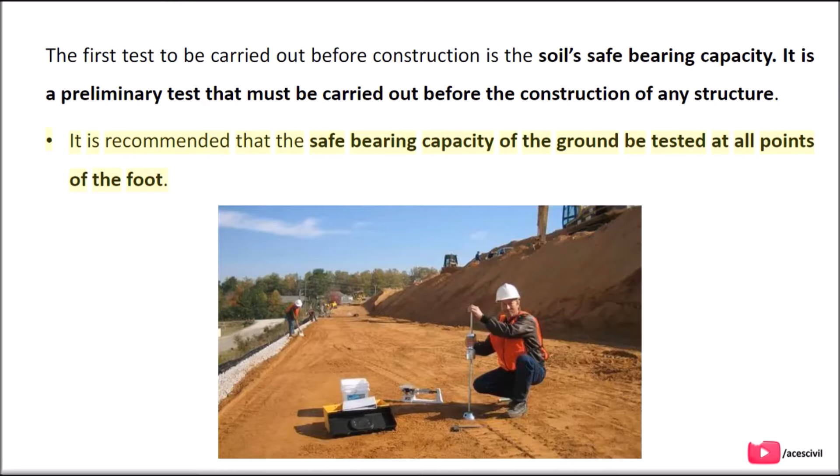In today's video we are going to discuss what is SBC of soil. The first test to be carried out before construction is the soil's safe bearing capacity. It is a preliminary test that must be carried out before the construction of any structure. It is recommended that the safe bearing capacity of the ground be tested at all points of the footing.

What is SBC of soil? The safe bearing capacity of soil field test is performed to verify the soil's ability to support loads. Let's consider an example of a small plastic chair. The small plastic chair is made for children and can support a capacity of 10 kilograms. Suppose an adult sits down, the chair will be broken. The same case is applied to the soil.

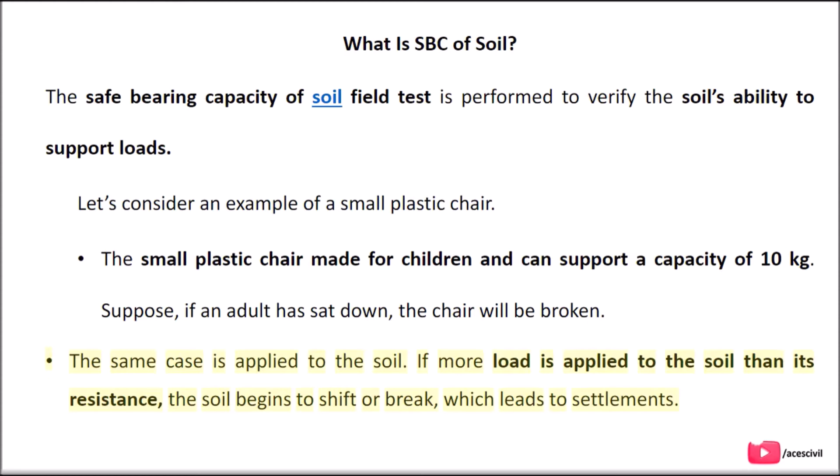If more load is applied to the soil than its resistance, the soil begins to shift or break, which leads to settlements. In order to keep the structure safe, the safe bearing capacity is calculated on the field at different points, and the footing selection is made accordingly. The maximum load per unit area that the soil can support without any displacement or settlement is referred to as safe soil capacity.

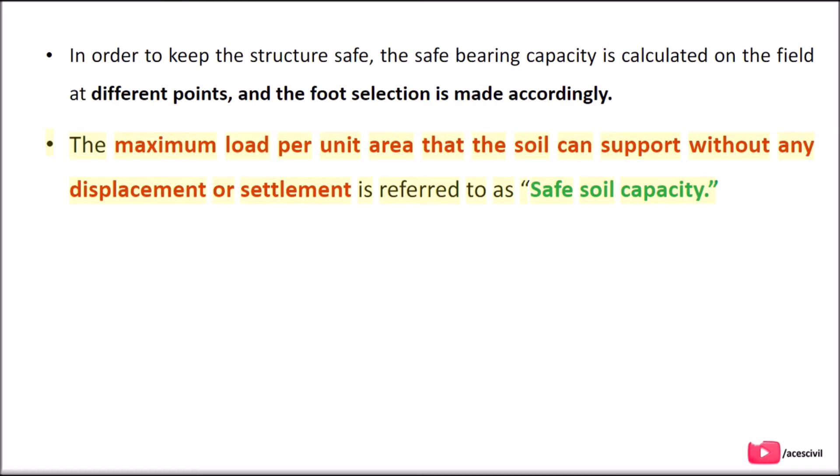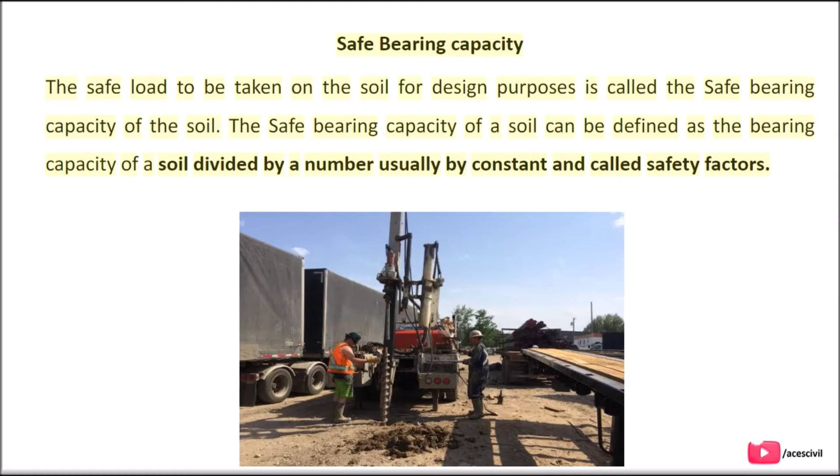Safe bearing capacity. The safe load to be taken on the soil for design purposes is called the safe bearing capacity of the soil. The safe bearing capacity of a soil can be defined as the bearing capacity of a soil divided by a number, usually a constant, called the safety factor. The safety factor depends on the type of construction and the nature of the soil. Generally, a safety factor of 2 to 4 is used for different purposes.

If the final load of the soil is 6 tons/m2 and its safety factor is 3, the work or project loads to be given to this soil will be 6/3 equals 2 tons/m2.

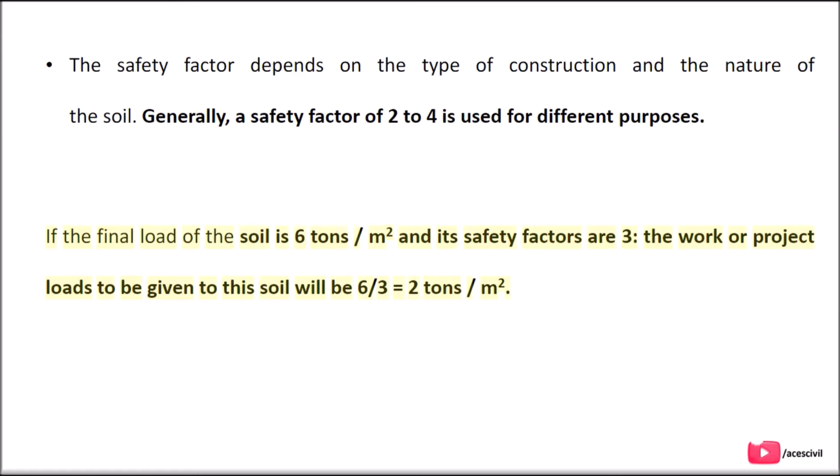Soils and their bearing capacity. The soils on which a structure rests can be classified into 3 categories. Hard soils. These soils are generally rocky in nature, incompressible, and can withstand reasonably good loads. Solid rock, murum, and rocky soils are examples. Soft soils. These are alluvial soils and are compressible when loaded. They can carry a lot of loads. Common clay and common soils are examples of this.

Spreading soils. These soils are compressible when confined and prevented from spreading. These soils, when loaded, spread laterally. Sand and gravel are examples of this type of soil.

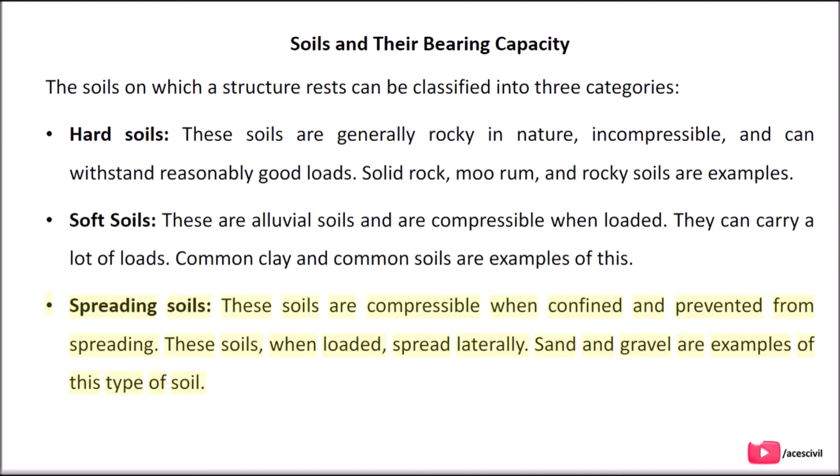Safe bearing capacity values for different soils. The capacity of the soil to allow loads from the foundation is called the bearing capacity of the soil. The gross pressure at the base of the foundation at which the soil fails is called the ultimate bearing capacity. When considering different failure conditions, the ultimate bearing capacity is divided by a certain safety factor, and the resulting one is called the safe bearing capacity of the soil.

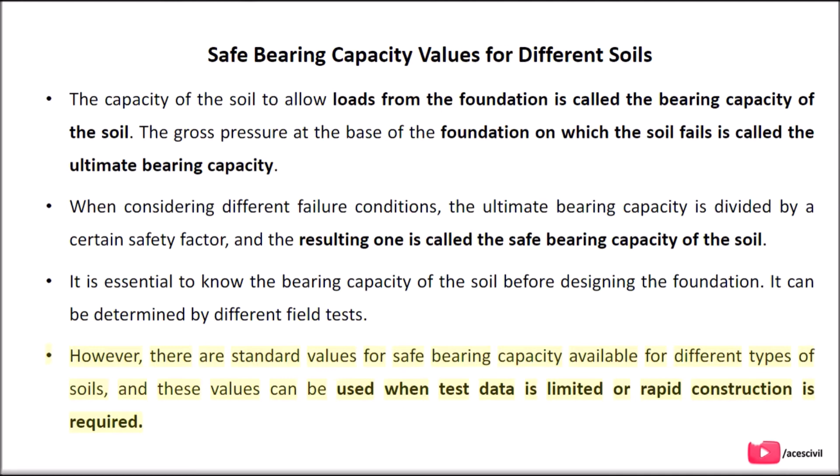It is essential to know the bearing capacity of the soil before designing the foundation. It can be determined by different field tests. However, there are standard values for safe bearing capacity available for different types of soils, and these values can be used when test data is limited or rapid construction is required. Values of safe bearing capacity for different soils. The following provides values for the safe bearing capacity of different soil types.

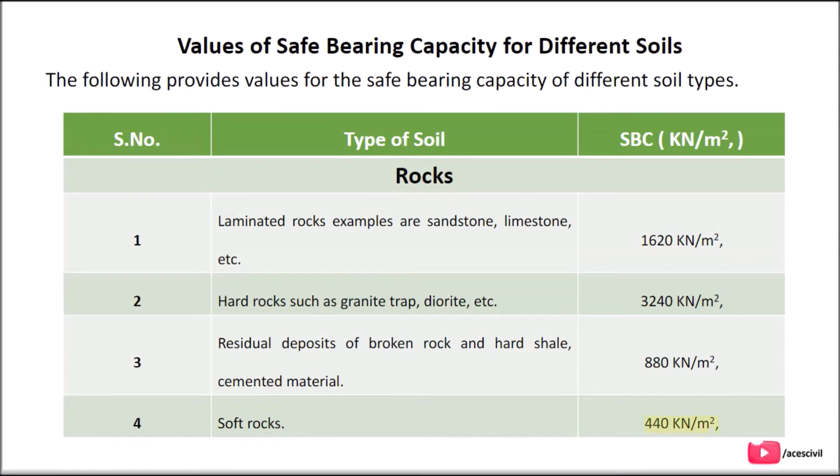S.No., type of soil, SBC in KN/m2. Rocks. 1. Laminated rocks, for example sandstone, limestone, etc.: 1620 KN/m2. 2. Hard rocks such as granite, trap, diorite, etc.: 3240 KN/m2. 3. Residual deposits of broken rock and hard shale, cemented material: 880 KN/m2. 4. Soft rocks: 440 KN/m2.

S.No., type of soil, SBC in KN/m2. Cohesive soils. 1. A wet mix of clay and sand that can be indented by thumb pressure: 150 KN/m2. 2. Black cotton soil, expansive clay, 50% saturated, in the dry state: 130 to 160 KN/m2. 3. Soft clay indented with moderate thumb pressure: 100 KN/m2. 4. Soft shale, hard clay in a deep bed, dry state: 440

KN/m2. 5. Medium clay easily cut with a knife: 245 KN/m2. 6. Very soft clay that can be penetrated a few centimeters by tapping: 50 KN/m2.

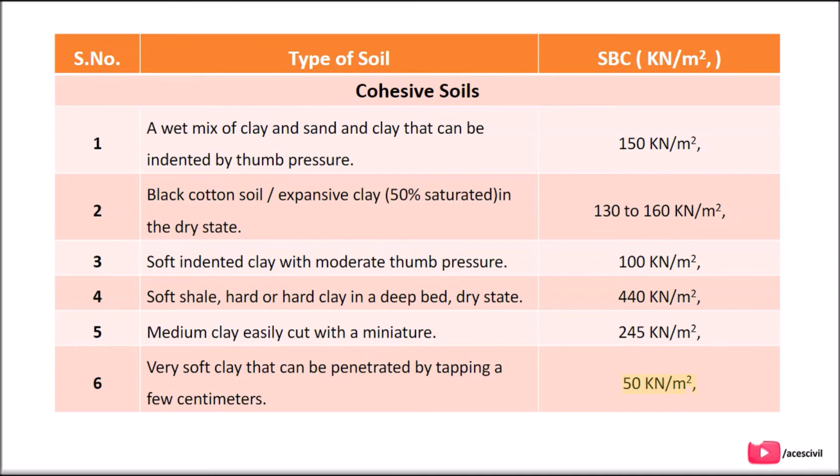S.No., type of soil, SBC in KN/m2. Cohesionless soil. 1. Compact mix of gravel and sand with good resistance to tool penetration: 440 KN/m2. 2. Compact and dry coarse sand: 440 KN/m2. 3. Medium compact dry sand: 245 KN/m2. 4. Mixture of loose gravel or sand, dry state: 245 KN/m2.

5. Fine sand and silt, composed of dry pieces: 150 KN/m2. 6. Loose and dry fine sand: 100 KN/m2.

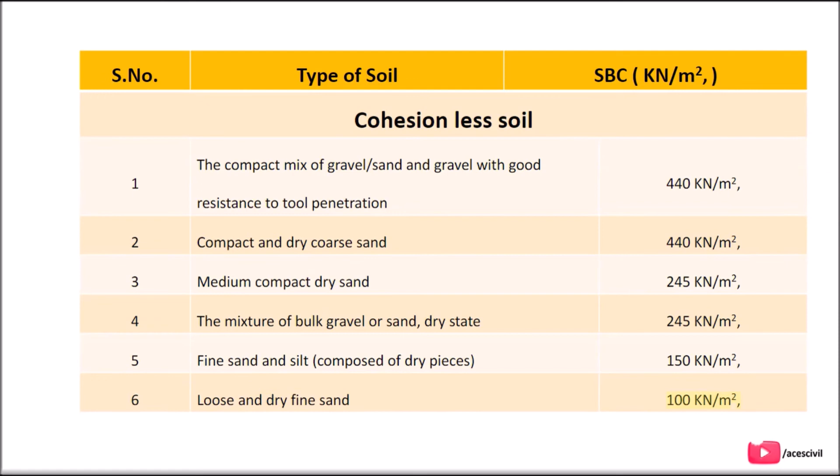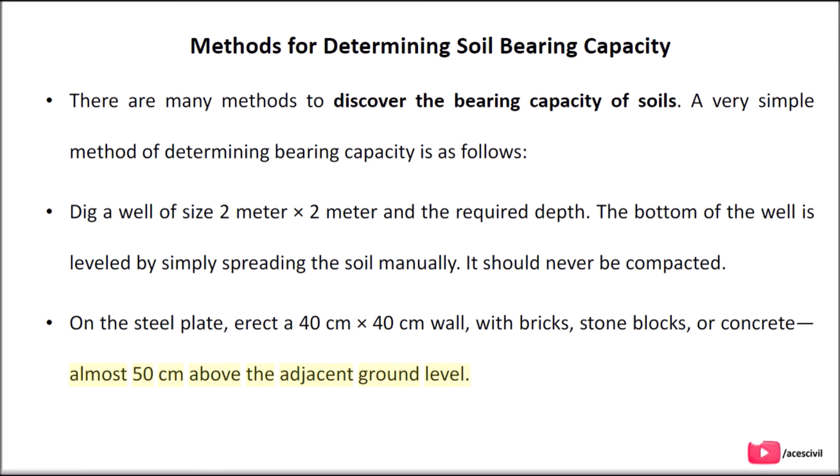Methods for determining soil bearing capacity. There are many methods to discover the bearing capacity of soils. A very simple method of determining bearing capacity is as follows. Dig a hole of size 2 meter x 2 meter and the required depth. The bottom of the pit is leveled by simply spreading the soil manually. It should never be compacted. On the steel plate, erect a 40 cm x 40 cm wall with bricks, stone blocks, or concrete, almost 50 cm above the adjacent ground level.

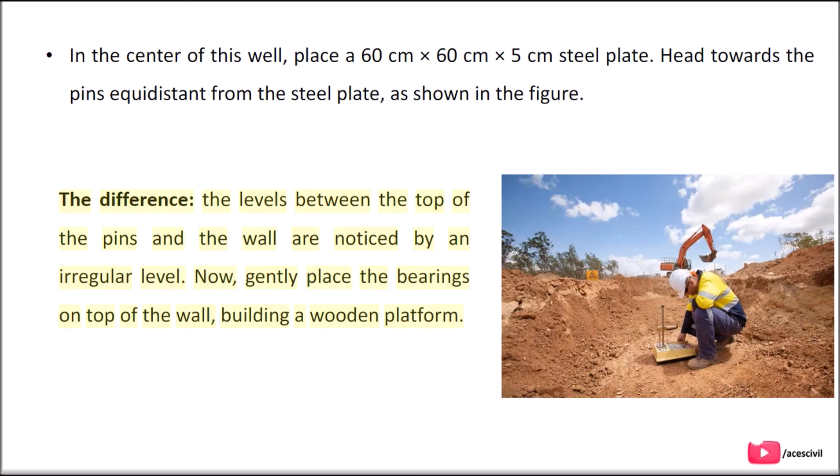In the center of this pit, place a 60 cm x 60 cm x 5 cm steel plate. Drive four pins equidistant from the steel plate, as shown in the figure. The difference in levels between the top of the pins and the wall is noted with a level. Now, gently place the loads on top of the wall, building a wooden platform. The load may consist of sandbags, beams, or RSJ. The loads are increased by an adequate amount, usually 0.5 tons at an interval of 20 to 30 minutes.

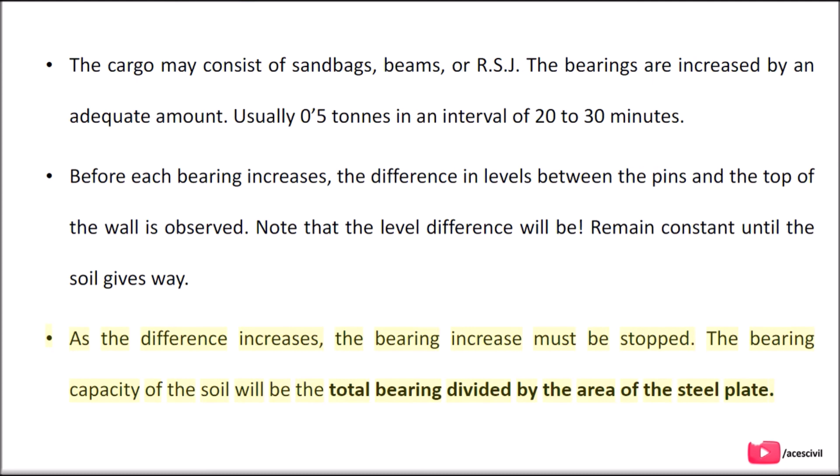Before each load increase, the difference in levels between the pins and the top of the wall is observed. Note that the level difference will remain constant until the soil gives way. As the difference increases, the load increase must be stopped. The bearing capacity of the soil will be the total load divided by the area of the steel plate.